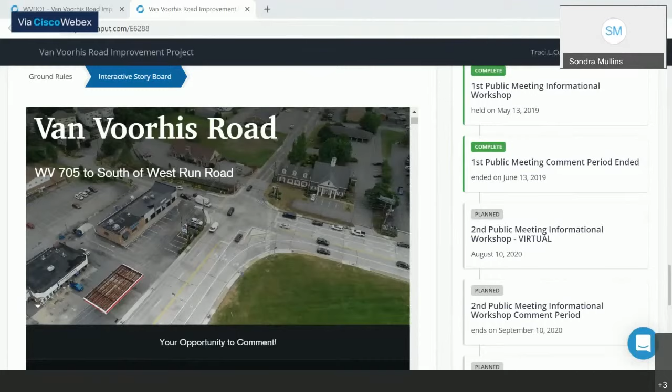Right now, we're going to show you the Van Voorhis Road storyboard. And this is actually going to show you a drone footage of Van Voorhis Road from 705 to the south of West Run Road.

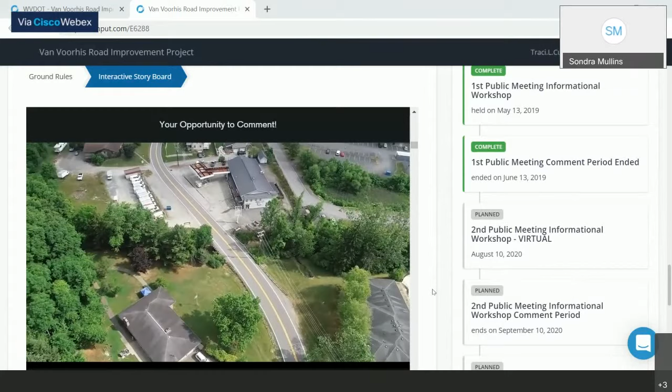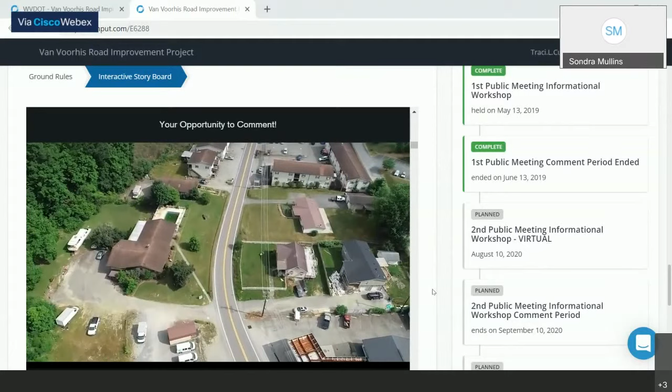And now we're approaching the bridge over West Run that we're replacing. Also, the geometry on approach there, the vertical profile is being improved as part of the bridge replacement. There will be a temporary bridge during construction on the right side going north. So the temporary bridge will tie in about the end of the canopy for the old gas station. And then in this area, we transition to the end of the project, the end of section 1, and the beginning of future section 2.

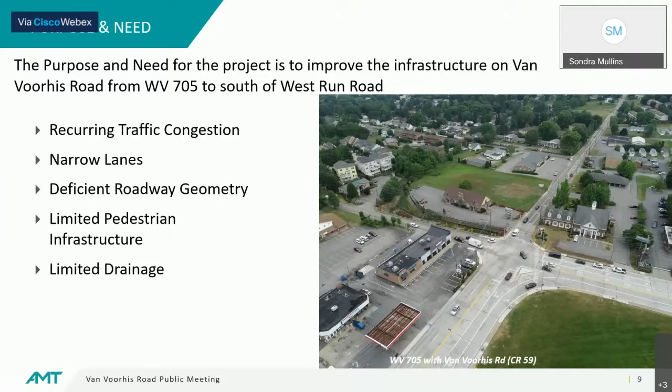So as noted, the project limits for this section of the project are from 705 to West Run Road. A previous design study was performed from 705 to Baker's Ridge that developed the improvements that are in this proposed plan. They predominantly include intersection improvements and geometric improvements. There are significant challenges and obstacles within this corridor. It's a very developed urban corridor with steep terrain and development hugging the roadway with lots of utilities and a high traffic volume that makes the traffic a challenge.

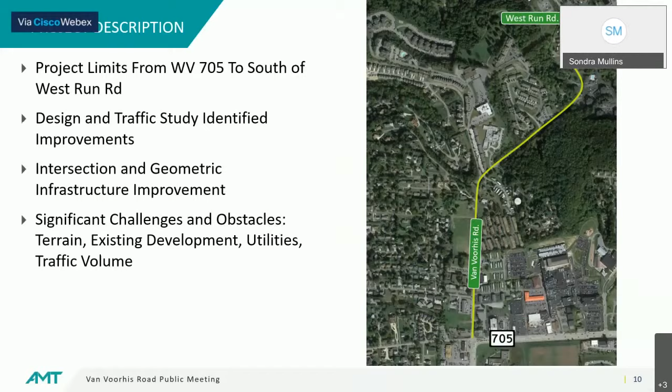So the improvements that we're going to discuss tonight are shown here. So the first improvement going south to north is improvements at the West Virginia 705 intersection, which includes widening on Van Voorhis Road. We're also proposing sidewalk extension to Southview Drive, side street improvement, vertical geometric improvement on Southview Drive and Clearview Avenue, and improvement of the geometry at the Wedgewood Drive Hirschman Village curve.

We are adding retaining walls to reduce our impact to a wetland area, and this is being done throughout the project to implement paved shoulders and wider lanes. And also in the northern end, we're proposing replacement of the existing bridge over West Run. And now Brian is going to talk about the NEPA process for this project.

Thank you, Tim. As part of the Van Voorhis project, West Virginia Division of Highways has been analyzing the potential effects the project may have on natural resources, cultural resources, and socioeconomic, sometimes referred to as community resources. To evaluate potential effects, a study referred to as a categorical exclusion is being conducted as required under the National Environmental Policy Act, also known as NEPA. The categorical exclusion is conducted for those projects, including Van Voorhis, that typically have minimal effects overall.

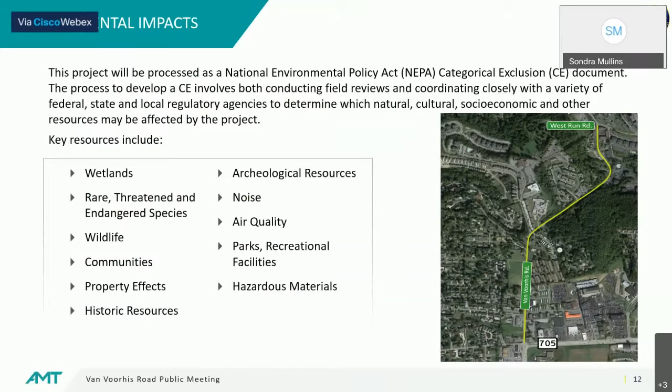We're also proposing pedestrian improvements in the intersection, both signalized improvements and geometric improvements. We're adding a raised island that will serve as a refuge island for pedestrians, and will also relocate the pedestrian crosswalks to reduce the pedestrian crossing distance. The exclusive pedestrian phase will remain and will be enhanced with a no turn on red blank out sign to further protect pedestrians. The lane configuration on the 705 eastbound approach will be modified so that all right turning traffic will use the right turn lane.

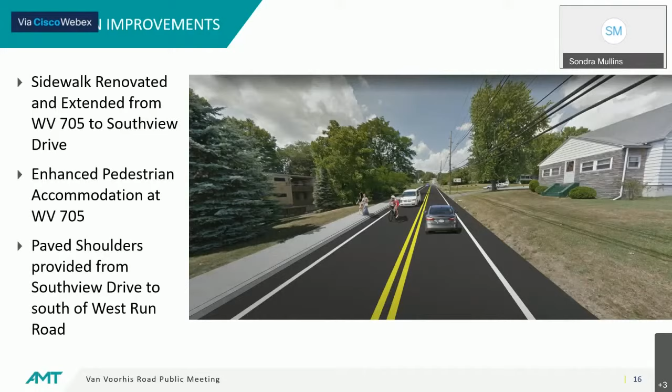Pedestrian accommodation is important in this area. There's a lot of students and pedestrians that use this roadway. We're proposing to extend the sidewalk and renovate the existing sidewalk all the way to Southview Drive on the left going north. And also throughout the limits of the project, add paved shoulders to reduce the occurrence of run off the road collisions and create a wider roadway for all road users.

So throughout the project, drainage improvements are going to be implemented. Drainage improvement was made on the very southern end in a previous project. Now we're extending that all the way through. We're adding additional inlets to collect more runoff from the roadway and the travel lanes.

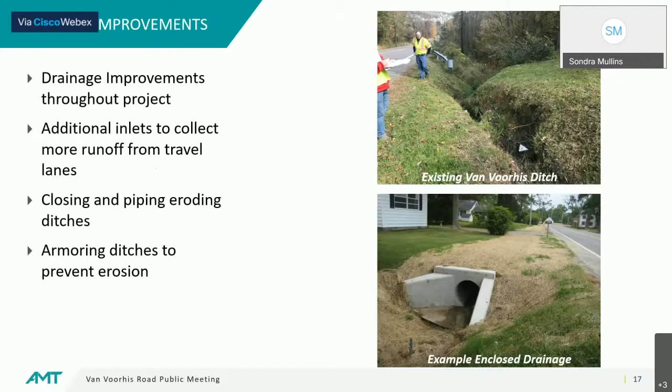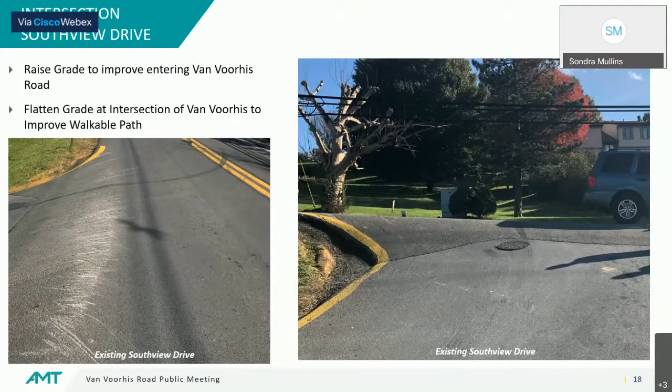We'll also improve the approach of some of the side roads, both Southview Drive, as shown in this picture, where motorists drag the road trying to make a turn to enter because of the steep difference between the approach roadway and Van Voorhis. This will also create a more walkable path for pedestrians. And also at Clearview Avenue, the same treatment will be implemented to make it easier for motorists to enter the roadway.

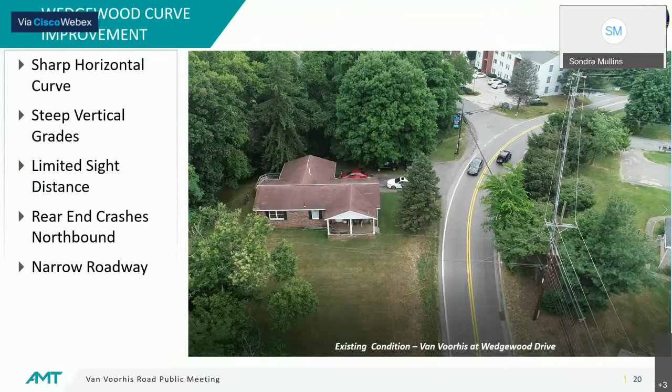One of the major improvements in this project is the improvement of the Wedgewood curve, Hirschman Village across the road. It's a very sharp horizontal curve with steep vertical grades on approach. And there is a pattern of rear end crashes that have been identified for motorists trying to make a left turn to Wedgewood due to the geometry and limited sight distance. The roadway is also very narrow. So all of these issues combined result in limited sight distance throughout this area, both on the main line and on the side street approaches, as you see here.

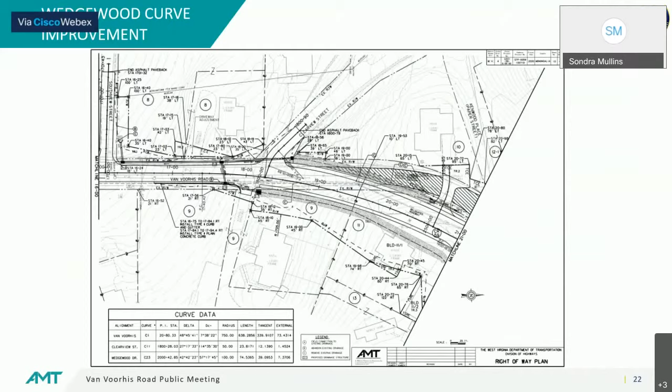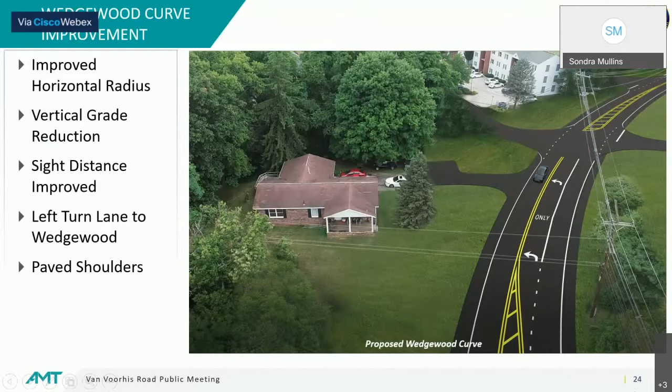So what we're proposing to do, this is the plan sheet of the improvement, is relocate the curve to the inside towards the Hirschman Village side, and also drop the vertical grade of the roadway and improve the roadways as they intersect with Van Voorhis Road. This shows a rendering of what the improved roadway will look like with the turn lane, with the modified horizontal and vertical geometry, and the improved side roads, along with the paved shoulders.

So I mentioned the paved shoulders a couple times, and this is a treatment that we're proposing to carry throughout. Those shoulders will be 4 to 5 feet in width, depending on location. And again, that is done for multiple reasons, but accommodates other road users and also reduces the occurrence of run off the road crashes.

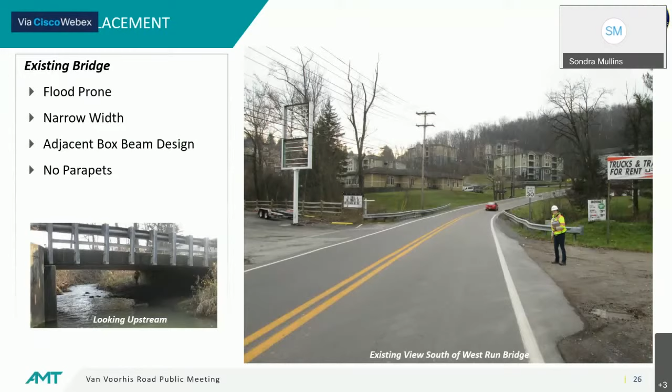So there's an existing bridge near the northern end of the project over West Run Stream. It's very low in elevation and it's often overtopped with flood events. It's also very narrow. So we're proposing to replace that with a long-term durable bridge that will be higher in elevation to minimize flood overtopping. Also will include shoulders to improve safety. And also it's being developed so that it will be wide enough for future widening when that is necessary.

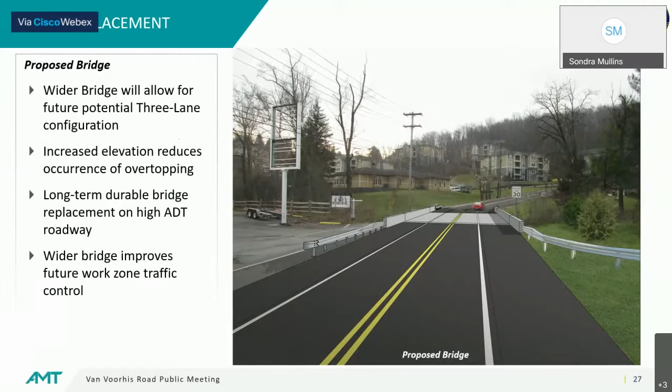Now, to implement all of these improvements, there is anticipated to be right-of-way impacts. Based on our preliminary plan thus far, there will be a number of temporary construction easements, and then also land immediately adjacent to the roadway may be needed to implement the widening. And based on our preliminary plan, and as shown in the excerpt from the plan sheet, there is one property that we believe is likely to be a take, and that is the residence at the corner of Hirshman Village and Van Voorhis on the opposite side from Wedgewood Road.

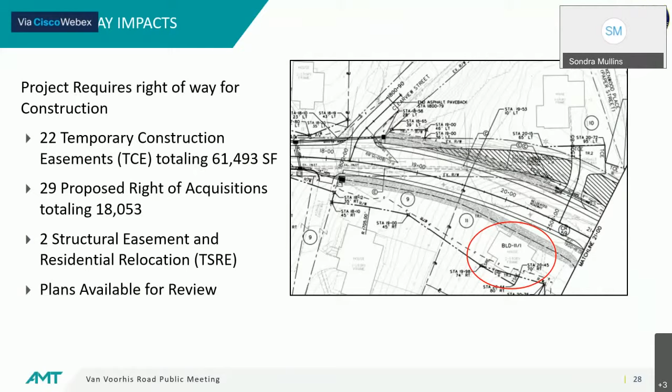Plans are available. There's a link in the public meeting site, and also Division of Highways can make those available as well. And with that, I'll turn it back over to Sondra. Thanks, Tim, Brian, for your presentation.

As you can see up there, these are our comment procedures. Please get online and comment. It will be open till September the 10th. You can do a voicemail, text, online, or by mail. And we are here tonight till 8 o'clock to answer any questions that you may have. Also, once the environmental clearance document has been approved, we will update that on our website so that you can go, and if any questions that we did not get to tonight, we will address those in the NEPA document. So go ahead and get your questions in and we'll be glad to answer them.

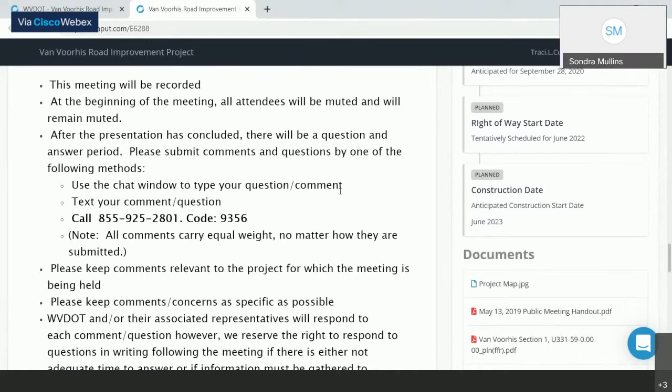Okay, we've got some questions coming in. The first question is, what is the cost to construct a right turn lane from Van Voorhis Road to Burroughs Street? We really don't have the breakdown of pieces of the project. We can get that for you if you want to send us a separate or private message or leave your email address on this, we'll be more than happy. But currently, right now, we don't have that cost broken down.

Okay. Next question. We thought we heard that it was mentioned in the opening statements that this project included the West Run to Baker's Ridge project. Does this mean that the West Run to Baker's Ridge project has been modified or replaced with this project? Thanks for your efforts on what seems to be a vast improvement to the roadway.

Well, sorry for any confusion, or if we led you to believe that the second, what we call the second phase, which is from West Run to Baker's Ridge. This project we are talking about, the NEPA is for, is the first phase or the first section of Van Voorhis upgrade, which starts at the intersection of 705 and it ends at West Run. We are not going beyond West Run. There is no funding and we don't have the NEPA done for that. The current project again starts at intersection of 705 and it ends at the intersection of Van Voorhis and West Run Road.

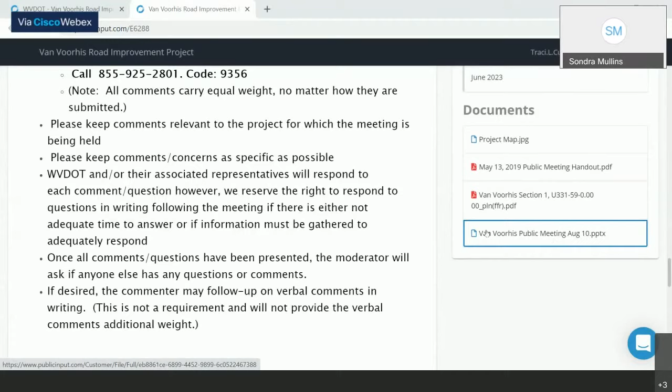We just wanted to point out, as you can see on the screen right now, this is the actual public meeting website. If you go all the way down to the bottom on the right hand where it says documents, you can download all of these. This is a project overview map. This is the information that we handed out in the 2019 public meeting. This is the set of plans that was referred to during the presentation. And this is the actual presentation that you saw. So all of that information is available here. The YouTube video of the drone footage is also available at this link.

There's somebody distracting us.

Explain the reasoning behind the lack of formal pedestrian facilities between Southview and West Run, particularly between Southview and Wedgewood. At Southview, the grade of the road starts to get very steep, and it gets very difficult to build a sidewalk per federal ADA law and PROWAG guidelines. So it becomes almost impossible to do so. So that's why the sidewalk was ended at that location.

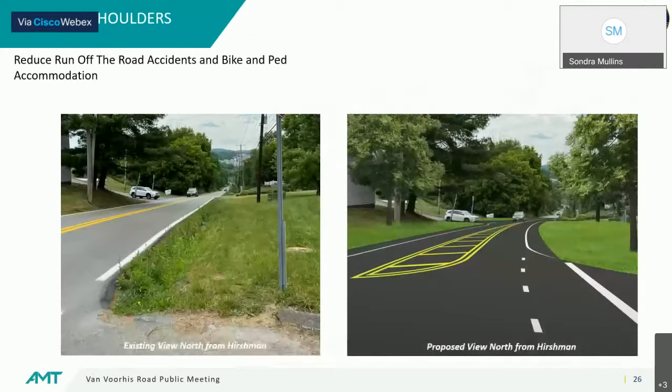Next question. The sidewalk is a much needed addition and greatly appreciated. However, a lot of the student housing is located past Southview Drive. Are there any future plans to extend the sidewalk? Again, it's not part of the scope of this project, and we are unable, for what was mentioned earlier, because to accommodate ADA, the federal guidelines and the federal requirements, the sidewalk would not be able to follow the horizontal and vertical geometry of the roadway because of the steep grades.

For us to maintain a sidewalk accommodation, to accommodate the ADA, we would have to deviate from the line and grade of the roadway, meaning we would have to separate it. That means a bigger footprint, a totally different environmental NEPA requirement. And again, the cost will be much higher. And also, I'm really not sure if we can condemn or use eminent domain to put sidewalk if we deviate from the footprint of the roadway.

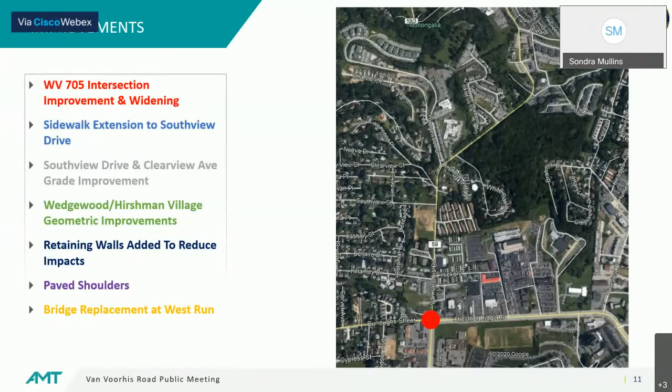Next question. How can a new right turn lane from Van Voorhis Road to Burroughs Street also be a through lane for traffic on Van Voorhis Road without additional widening on Route 705? There will be a lane shift with this, and there will be pavement markings that are not shown on this rendering that will align those lanes.

Again, this is a low-speed urban environment, and that's fairly common in some intersections to improve capacity. It's a very wide intersection, so in reality, there's a pretty long space, a long distance to make that shift.

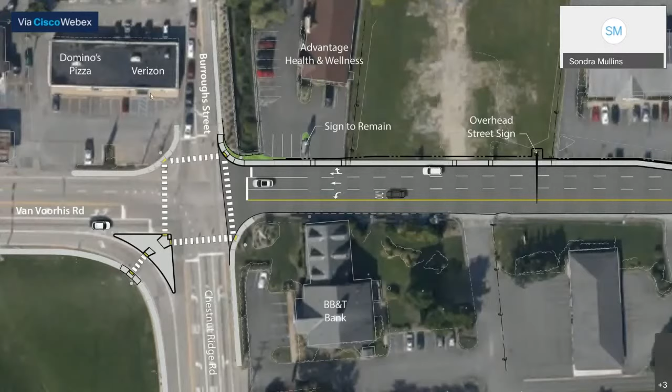Okay, next question. Would you consider a hard curb rather than paved shoulders as a means to reduce road departure crashes? Based on the Highway Safety Manual, a 4-foot shoulder, a 5-foot shoulder is shown to have a very significant crash modification factor. So I really think that the safest for the motorist is to have the paved shoulder.